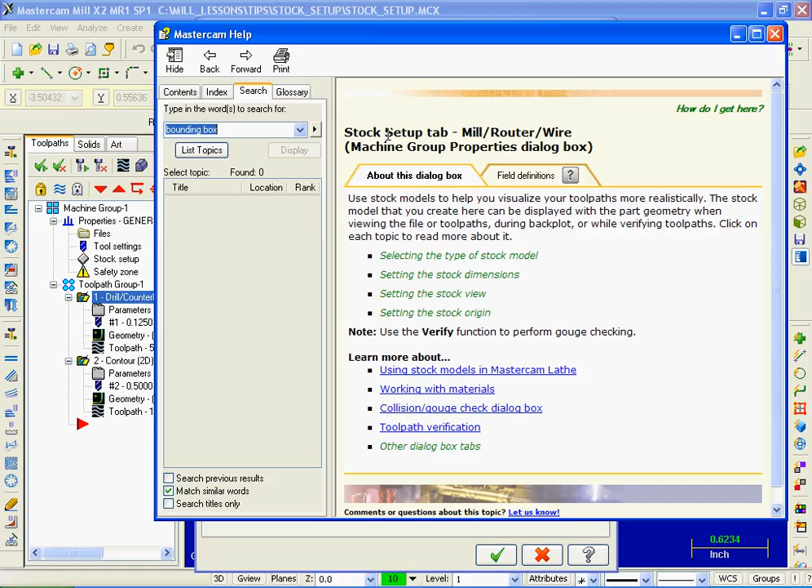I'm going to click Field Definitions, and this will give you more information on the different buttons that you're going to find in Stock Setup. So don't forget, Help is just a click away. What I'm going to do is move up now to the right corner of the Help box and click Close.

Now the first thing that we're going to do is check out Bounding Box. Bounding Box calculates the sizes of the part, and these values are then input into the X, Y and Z values. So I'm going to click on the Bounding Box button, and over on the left the Bounding Box dialog box appears. Starting at the top, we've checkmarked all entities, so it's going to base this calculation on all the entities, all the parts of our geometry.

Just below in the Create section, the only checkmark is against stock, so all we're going to be doing is creating stock. Lines and arcs creates a closed boundary of lines if the shape is rectangular. Points creates points at the corners or extents of the bounding box. And center point creates a point at the center. So for the create, I'm just going to leave stock activated.

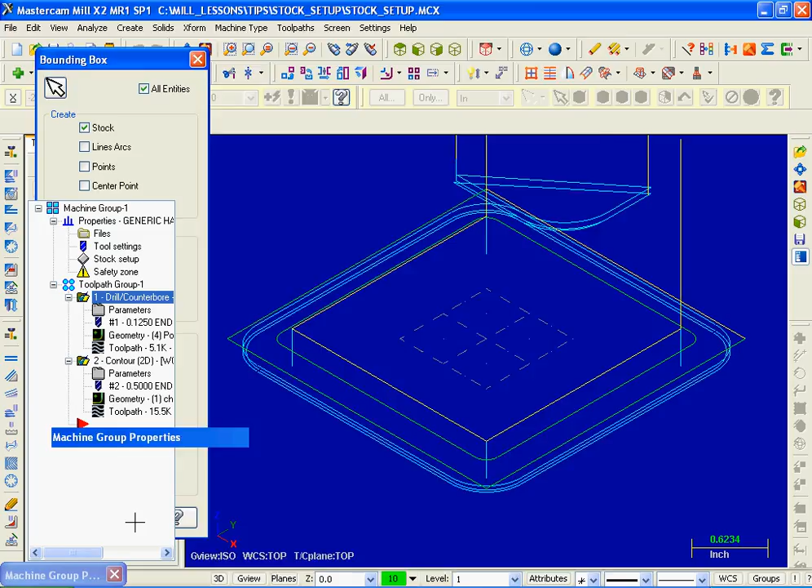Now down below in the expand section, X is set to 0.2 and Y is 0.2. I'm going to change this to 0 in X, 0 in Y. So I don't want to expand the geometry at all for this stock. I'm going to click on OK. Now the X and Y values read 3 for the Y, 3 for the X. So we haven't expanded the geometry at all. Now for the Z, I'm going to input 0.25.

Over on the left we've got display activated and also a check mark against fit screen, and wireframe is activated. So I'm going to click on OK, and let's see what's happened. The red dashed lines represent the stock material. Let's go back into Stock Setup again. The arrow from Stock Origin is pointing to the center of the part, and the values for the Stock Origin are all 0. So X0, Y0 is the center of the part, and Z value of 0 is at the top of the part.

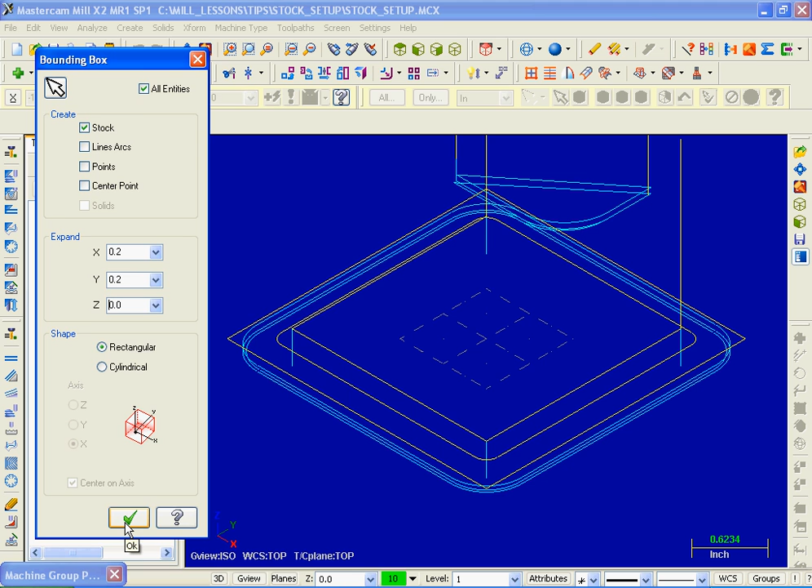Let's go back into Bounding Box again. This time let's expand X by 0.2, expand the Y by 0.2, and let's find out what happens. I'm not going to change anything else, just going to click on OK. So as you can see, the X and Y now read 3.4. I'm going to change the Z back to 0.25 and click on OK. We expanded by 0.2, so from the edge of the geometry to this red dashed line is 0.2.

Let's go back into Stock Setup and have a look at the Stock Origin. The arrow is pointing to the center of the part, and the values are all 0. Let's change this. I'm going to move over to the lower left corner and click this point. So now this lower left corner is X0, Y0, Z0. I'm also going to change the Y back to 3 and the X back to 3.

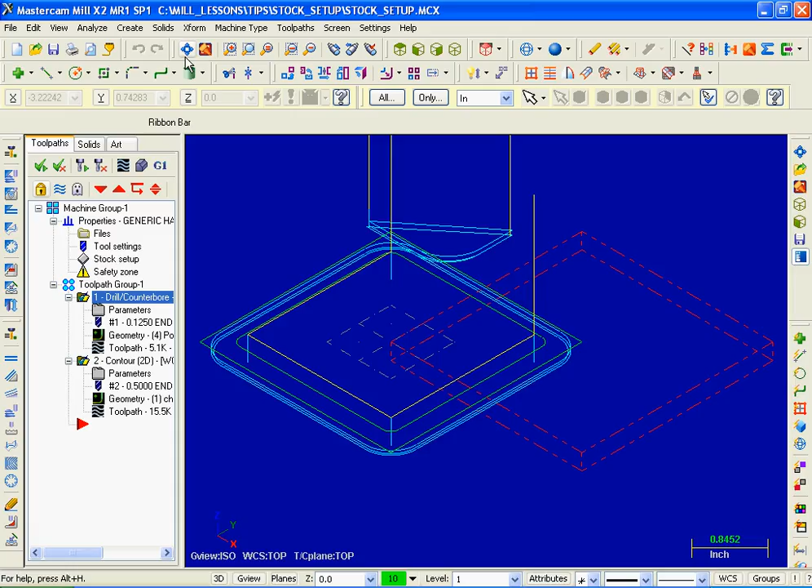Let's see what this has done. I'm going to click on OK, and do a screen fit. So what we've done is said the lower left corner of the stock, position it at X0, Y0, Z0, which is no good for this part. So let's go back into stock setup and fix it up. Our X0, Y0 needs to be at the center, so all I'm going to do is click on the center of the part.

Looks good. I'm going to move over to the left and click on solid. So instead of wireframe, I've activated solid, and let's see what that looks like. So there's that solid representation. I'm going to click on screen fit, move back to stock setup again, and change it back to wireframe.

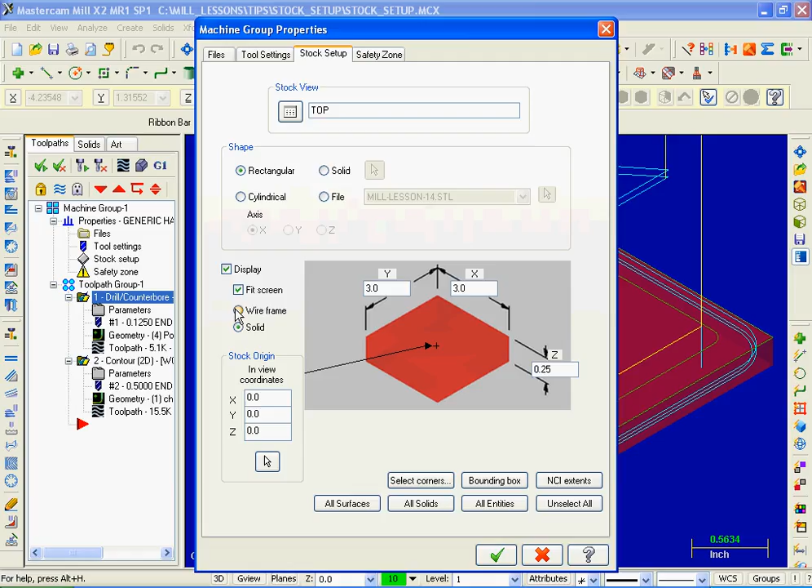Next up, let's go over to the tool settings page. Starting at the top, program number. This is where you can change this number to 1, 2, 3 or whatever, and this will show up as your program number when you generate CNC code. Over on the left, the feed calculation at present is from tool. From tool uses the feed rate, plunge rate, retract rate and spindle speeds directly from the tool definition.

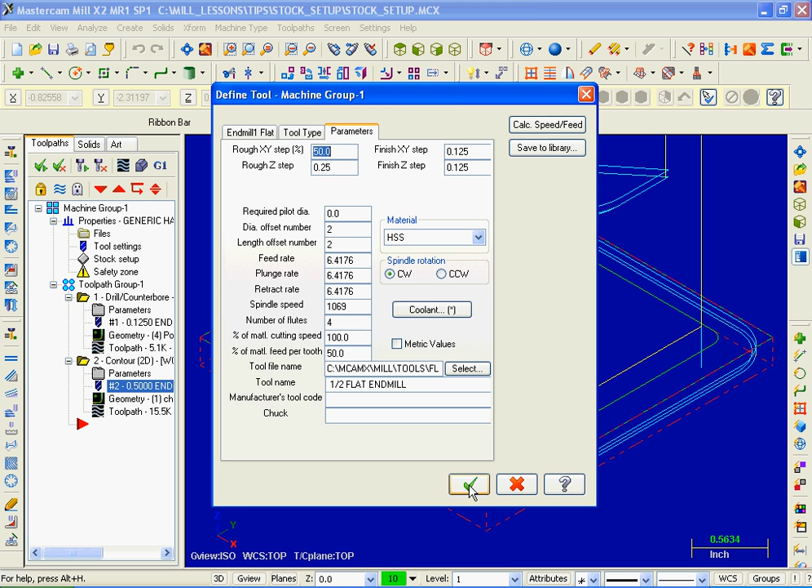Let me show you where it will take those speeds and feeds from. I'm going to click on OK, and in the toolpath manager I'm going to click on tool number 2, and go over to parameters. This is where it's going to drag these feeds and speeds from. Spindle speed is set to 1069 and feed rate 6.4176. I'm going to click on OK. Let's go back into stock setup again and click on tool settings.

Material calculates the feed rate, plunge rate, retract rate and spindle speed based on the type of stock material. And from defaults uses the settings from the toolpath defaults file. Moving down to the bottom of the screen, the material is set to aluminum inch 2024. I'm going to change it. I'm going to click on the select button.

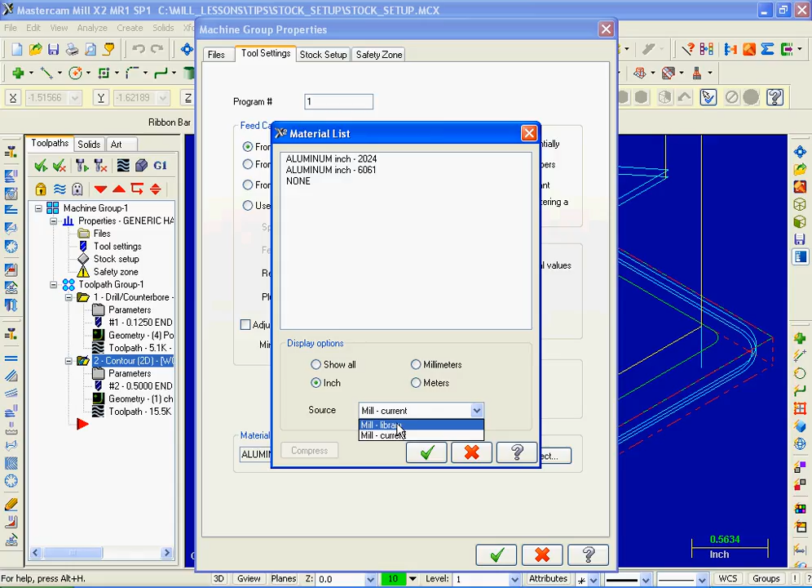At the very bottom of the material list dialog box, there's a source. I'm going to open up this drop down and click on mill library, and the material that I want to select is aluminum inch 6061. I'm done here. Going to click on OK, and OK again. That completes our video on stock setup.